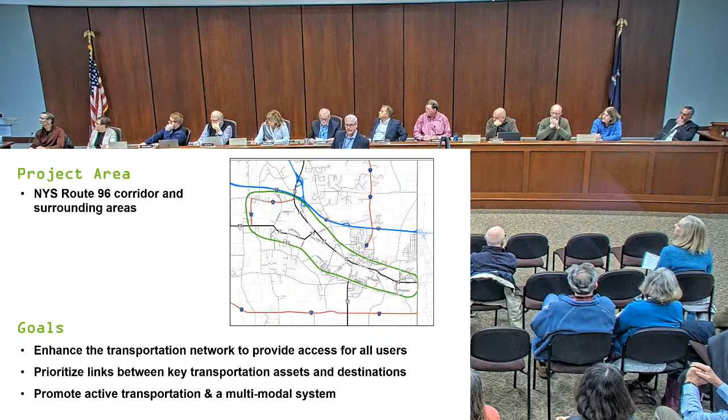Oh, I think I missed one there. Oh, so our goals here, I apologize, I hit advance too fast. So our goals were really to enhance the transportation network and provide access for all users. And what I mean by that is not just people in cars, but bicyclists, pedestrians, anybody else who can use the trails or sidewalks. We wanted to prioritize key links.

So where were some of those gaps where if I'm a pedestrian, I'm trying to get from point A to point B. And we were looking at those networks of roads and sidewalks to see where we could make those missing connections, if there were missing pieces, and where we could make those connections. And the last bullet really is promoting active transportation, and what that means, it's multimodal. Again, not just cars. We're looking at people, bicyclists, all users.

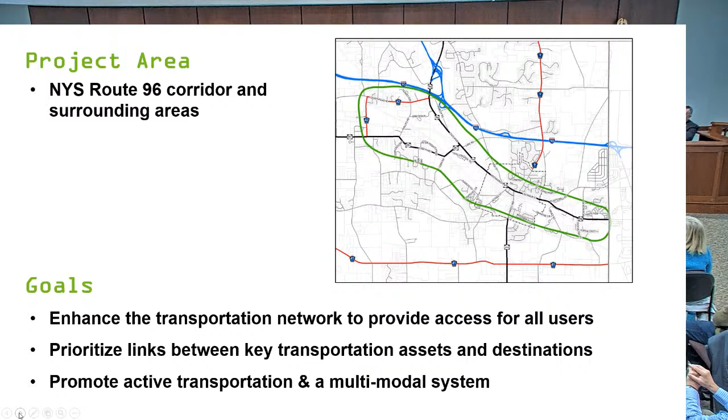So just a very quick summary of the town position statement, and these were sort of our marching orders when we started this, and this was in conjunction with the Genesee Transportation Council. We're following their process. It was really to help provide a guide, a roadmap to the future, given the conditions of what's there today, what is likely to happen, and what can we do to position ourselves in the town to make improvements, position the study to help secure funding. So this is what this plan was really about.

It looked at broader projects, the broader project study area, and that included the Adams Street extension. And one of the key things was to preserve and repurpose the railroad corridor for multimodal usage. And I'll be upfront with this. When we started, I know the railroad is a very hot topic, right? And we listened to what the rail company, their future plans were. We listened to what the town's thoughts and position was on that. And we tried to integrate it all together.

And at the point when we started, the marching orders we received were from the rail company, not the town. The rail company said, this line gets very limited use, and we're looking to abandon the line. So I'll be upfront with that. That's what we were told and how we designed accordingly. So that's why the Adams Street extension is one of the key topics in this whole project study. It certainly doesn't commit the town to any of the ideas we came up with.

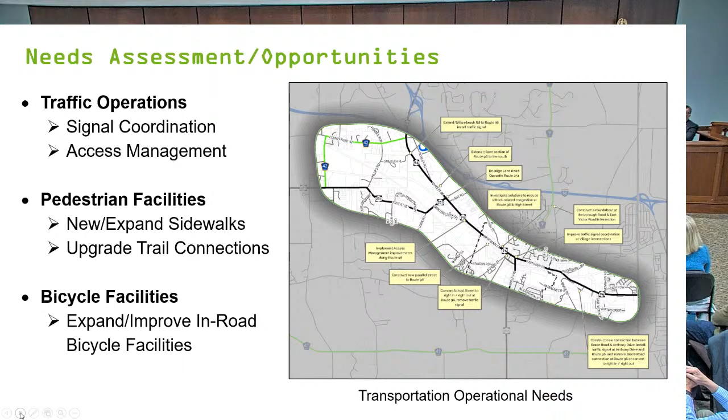So I want to touch on the public outreach a little first. I know during the course of the project, I'd get calls once in a while. My name was on the website, so I'd get people just interested and say, I didn't know about the meeting or that. So we tried many methods to reach out to people. I just want to go through them real quick. So last Christmas, during the Jingle Mingle, we were set up in here. We had about 75 people come in, talk to us, fill out surveys, which was great. Then online material was available to further comment for people who maybe weren't physically at the Jingle Mingle. We provided surveys, like I said, online.

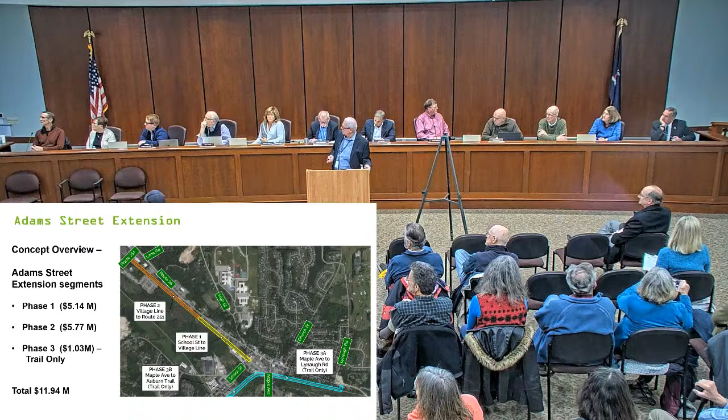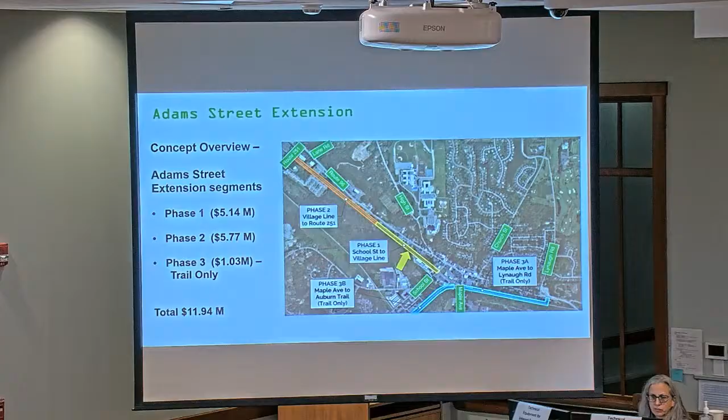So the extension of Adams Street looked at 3 sections. And the first one was the yellow outline, and that's from School Street to the Village Line. It's right in the middle, high priority. You have Adams Street to the east already. And that one was about $5 million to build a road. And I want to say this about the road. It's not a bypass. If you hear anybody say bypass, it wasn't in our report. We don't use that word.

It's a complete street, small, local, tight, smaller lanes, bike lanes. It's really not meant to be a cut-through street. It's meant to be a community street, and hopefully it sort of borders 96 to the north, and this new street to the south creates a nice space for the community. Sort of think about it as Mead Park, but extended and longer and bigger. That's what we're trying to achieve.

The second phase was further to the west, and that's from the Village Line to Route 251. And again, keeping that same street mentality of a local, small, tighter street. That is another almost $6 million to complete that. I mean, these are long runs, so the price adds up really quickly.

And then the third phase would go to the east side of Maple, and that's along the rail corridor. And there, at first we had presented continuing Adams Street, but again, based on feedback, people were more appreciative of saying, that side, maybe that's just a trail, not a roadway. And that's what we're showing there is a trail instead of a road. And again, it connects into the various trail network that you have in the village and the town already.

A little cheaper because you're not building a ton of asphalt. It's more just a small path. So $1 million for that. It totals just under $12 million if you were to do everything.

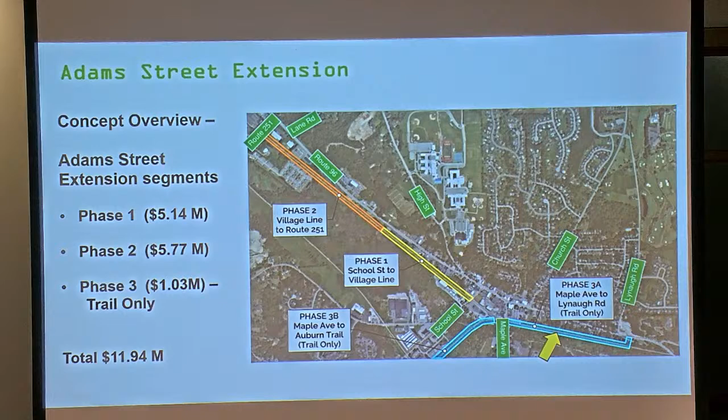And let me show you, this is sort of a section of a proposed road. To the right of the screen is Route 96 to the north. We purposely shoved the roadway closer to 96, and the reason for that is on the left side of the screen is the wetland area. We want to try to stay away from that for a myriad of reasons.

And what you're seeing in the section, as I mentioned, 11-foot lanes, a little tighter, 6-foot bike lanes on each side, 5-foot sidewalk, and this would be some commercial that's existing there now, some potential new driveway connections, and new short streets to connect into 96.

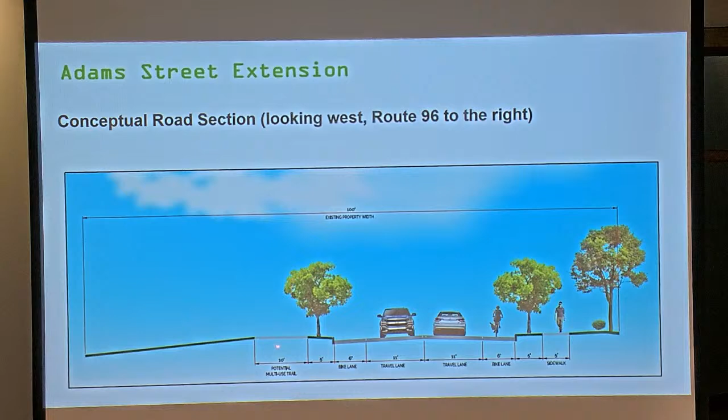And on this side, again, based on community input, they said, well, you have sidewalk over here, but this area is nice, it's not built up. You have nature. And so we put in a 10-foot multi-use path, so that way, if you're walking or bike riding, you could be on either side, depending what you want to do. If you're popping into stores and such, you have this side, and if you're just riding through to connect to the Auburn Trail or some other trail connection, you have a 10-foot path.

There was a concurrent study that was being done at the same time as ours. They were independent of each other, but what the Adams Street feasibility study did that we didn't do, they really got into the weeds of looking at what type of environmental issues are there, what type of right-of-way issues, just things that were beyond conceptual level for us. And what they did is a full topographic survey and mapping, so they fine-tune the property lines, things like that. They did environmental screenings to see where the wetland footprint is. Are there any other issues, rail ties, things like that.

And they developed a plan, had a slightly different section than ours. They were trying to reduce cost or minimize cost, so that didn't have the bike lane. So if you're looking at both plans together, you say, why is this one a little more? In the concept plan we did, it was because of the 6-foot bike lanes on each side. It adds pavement, it adds cost. That's why the price tag's a little different if you're comparing. It's not a direct apples to apples.

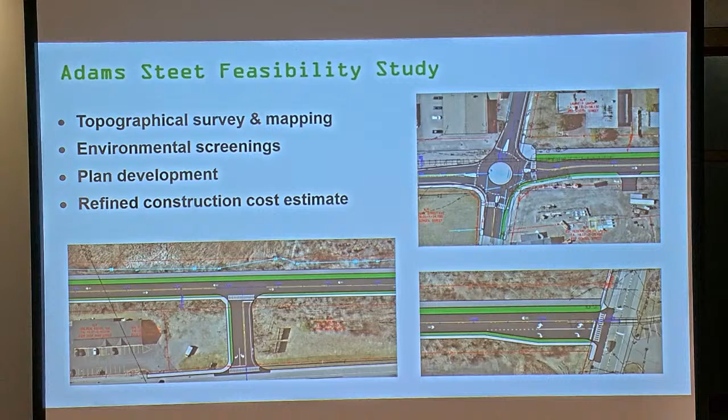The second item that got a lot of traction was Anthony Drive extension to Brace Road. And again, this is easier to show than explain.

So first, let's see, where's my, am I not? Oh, my arrows aren't coming up. I'll use my pointer instead. Okay. Maybe it's just catching up with me.

Sorry about that, folks. So, first, we have a stub road here now, Anthony, and we looked at connecting it all the way to Brace. One of the reasons for that, there were always talks about maybe some future town facilities coming in this area. I believe there's one more lot or spot for a building as part of this development. It made sense to pull everything together, and then you're coming out here, and it could trigger a need for a signal given the traffic on the one side of 96, and if you have all this new traffic coming here.

And that does work well with a previous study, the Victor Access Management Plan, where it said, what's the proper spacing? You don't want signals like every 1,000 feet because that creates a headache for the driver, right? And this was actually sort of perfectly spaced between signals. It's probably at least half a mile between them. The second item, you mentioned that, the potential signal.

Third was we did want sidewalk. You can see the yellow line there. I'm sorry about the shaky hand there. And eventually coming across Brace and then tying into the municipal park and eventually into the Auburn Trail. So we wanted to keep this all connected, especially if some town facilities end up over here. And let's see if I can get the 2 Brace Road options. Let's see if my arrows, oh, there we go.

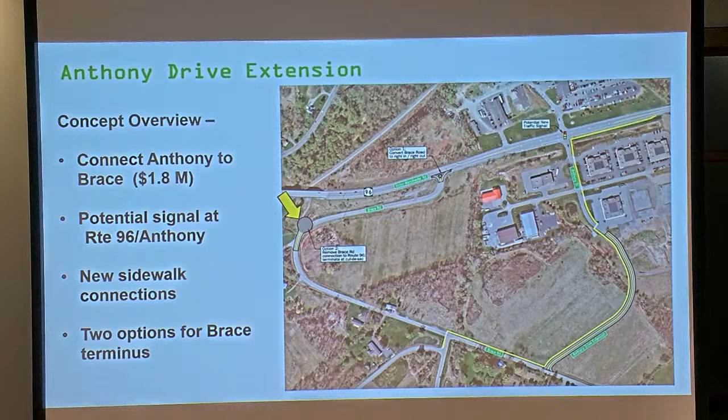For the pedestrians and bicyclists, in addition to the sidewalks, there's some treatments, and for any new projects, roadwork projects, or any retrofits, these are general recommendations we say should be in the toolbox for the town and the village to increase access and safety for the ped and bike users. Some of the things: high visibility signing and treatments, so bike lane signage, pavement markings to designate their space, hopefully a little buffer between cars and bicyclists. If you can't get the space, there are share lanes. This designates to the driver that it is shared space, maybe a little wider than 11 feet, to accommodate both bicyclists and vehicles.

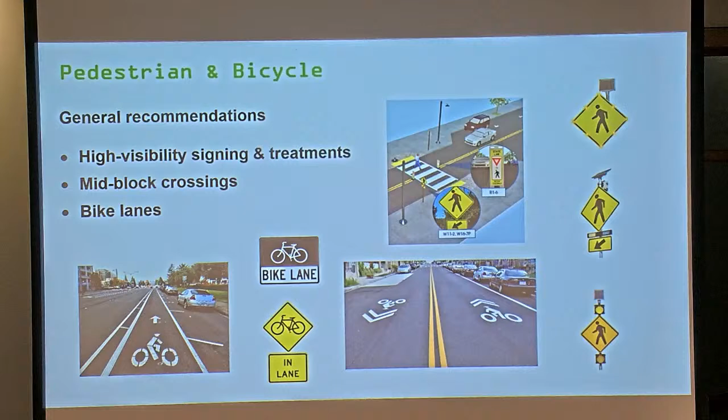And then for pedestrian crossings, this really is almost a Cadillac where you have striping, signage, and then things that really grab your eye if you're the driver. So this is a traditional flashing beacon to let the driver know there's a pedestrian in there. This is the newer item, rectangular rapid flashing beacons. When a call is made from a pedestrian, you get the strobing lights, LEDs, really high impact. And another option is the sign is bordered by LED lights, so it flashes and captures your attention, so you know it's somebody else's space at this moment.

Route 96 and High Street. So this had a lot of potential items that we could look at. The first one, and like I said, these are all concepts. It may never come to fruition, but we said, let's try things and see what happens. So this was a roundabout, and I know just like the railroad discussion, roundabouts elicit a lot of emotions, pro or con. Tonight, let's not yell at each other. It's an idea that was plopped on a piece of paper to see if it could work in the first place. It does require property takings.

It certainly decreases delays because there's constant movement, slower speeds, but you aren't stopped at a dead stop. There are a lot of safety benefits; you get rid of the left-hand turn high impact accidents. If you have any, they're usually minor side swipes. Little fender bender, but nobody's getting hurt. It does provide traffic calming by lowering speeds, which we want in the village where there's a lot of pedestrians and school kids taking High Street into the village. It can act as a gateway feature. There's a lot you could do with the roundabout, but it does have property impacts.

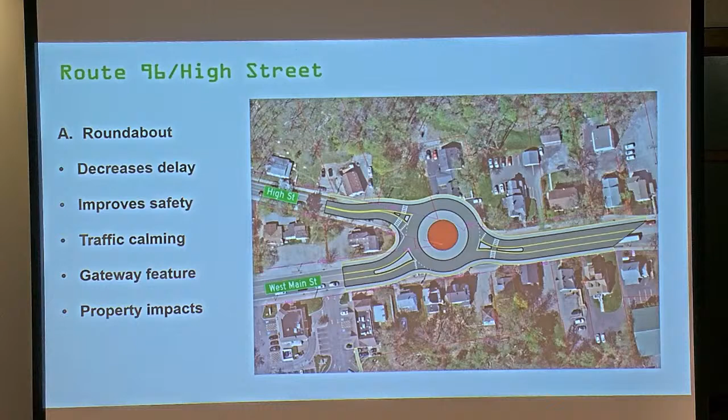You see the footprint. It's got to be a little wider. We tried to shove it to the north to minimize impact to these properties, but it does impact that property. There's ped accommodations on each leg. On this side, we removed... oh no, it's still there, I'm sorry. But it does have impacts. Something that big is not gonna not have impacts.

The second item we looked at for that intersection is improve existing signals. Like I said earlier, the state had installed new controllers, so they have intelligence. They work on calls, on demand. They were recently coordinated in October of 2021. What that means, they go out and do counts, and if one leg is heavier than the other, should we be giving more green time? So you develop phasing timings, plans and patterns to be the most optimal firing order of phasing.

There was the third bullet, adaptive signal control. You have 3 signalized intersections very closely spaced, which naturally causes problems because one spills over into the other. Adaptive signal control is smart technology for the lights. I guess it's detection on steroids. They aren't cheap though. Those are on the order of $50,000 to $60,000 per signal. You have to have a lot of video detection to look at all legs.

But what it does, it's more dynamic. So usually the old way, there may be inductive loops on the ground, or maybe a video camera, and it says, hey, that leg has 10 cars, time to shift and give some green there. And it does it on a sort of a fixed cycle. Adaptive control is a lot more dynamic and can be more responsive.

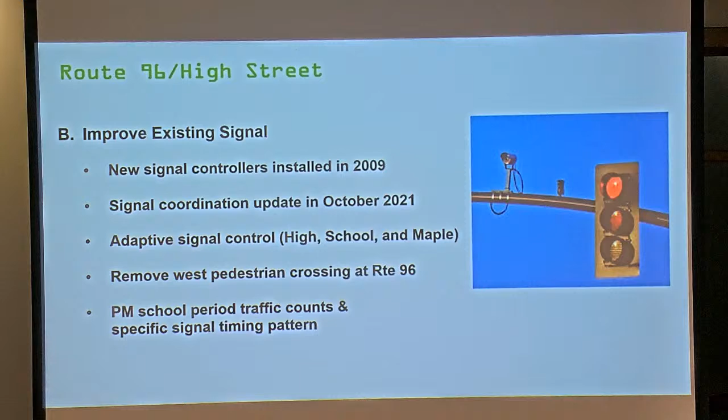The third thing we looked at, item C, and this one I got a lot of calls on, and naturally anybody who lives in the village was like, hey, what's going on? What are you doing there? So I'll try to go through this quickly. This was an idea, we worked with the village, the highway department, we'd always heard mention of, we have some ideas, and we doodled on paper.

We said, well, for historical context, let's document it just so we know what it looks like, because it was always just an idea, but we never had the lines drawn on there. So that's where this came from. We drew it up, and again, it looks like it's a real design plan, but it's a concept only, like, here's some potential connections that could maybe alleviate some of the issues at High Street. And I will try to point again.

So first was putting this new driveway to come out this way. And this would be a school bus only roadway to get out of the campus and come out to the light and have a traditional, maybe more of a 4-way.

There was the Dryer extension, and the idea is that maybe the traffic could come here. If they're going south of the village, they were probably doing this, and now maybe we could take them directly here and use that. And again, it's trying to sort of balance and not have everybody go to the one intersection. It was trying to give options that way.

And then the last thing was a new parallel road between Moore and School. Again, just trying to get traffic off this section. We looked at it like there's a subdivision back here, and hopefully the kids are just walking. I know there's a pedestrian trail there, but if they're not walking, maybe the parents, if they insist on driving, they can get them to the school without getting on 96, and hopefully there's some ways to get around that.